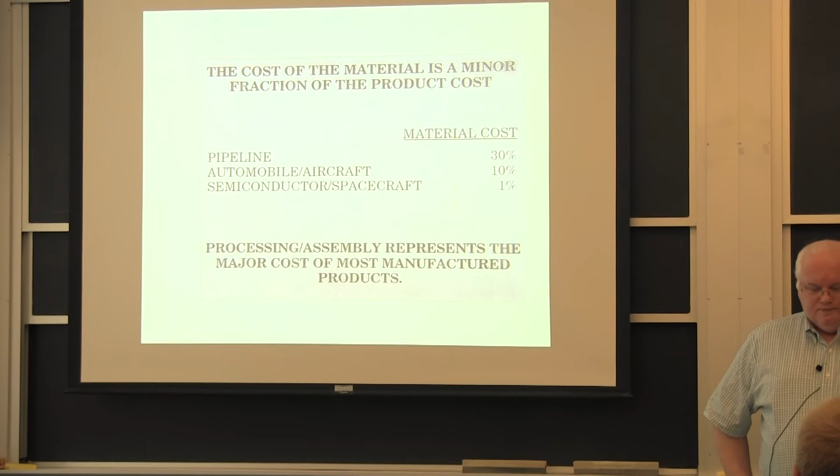Now, we can ask ourselves, and this is the last slide that I put up at the end of class last Thursday when I was lecturing. And it basically is, what fraction of a product's cost is the material cost? And the highest one that I know of is a pipeline. The steel that goes into a pipeline is about 30% of the cost of that project.

The rest of it is digging the hole in the ground, putting a corrosion-resistant coating on the pipe, welding it, burying it, inspecting it, testing it, all those other things go for 70% of the cost. An automobile or an aircraft, it's about 10% of the cost.

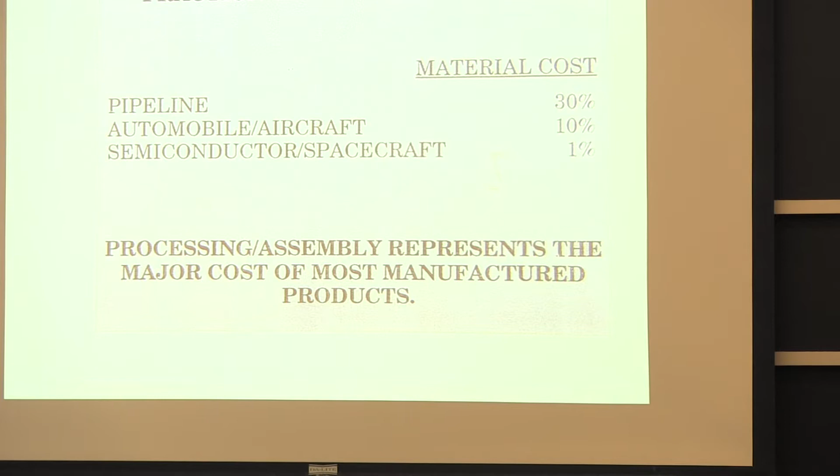Now, let's say I've got an automobile that costs $25,000. Does that mean there's $2,500 worth of materials in that automobile? No. Anybody know about how much the material costs in an automobile are? It actually is about 5%, because about 40% of that automobile cost is health insurance. Okay? If you actually go look at the numbers, the CEOs of a lot of the big automobile companies, and other companies too, have gotten very interested in health costs.

In fact, anybody live in Simmons Hall? Or know someone who lives in it? Okay, a couple of you. Do you know who Dick Simmons was? Actually, he still is. Dick Simmons was a graduate of this department in like 1952 or 53, got a bachelor's degree, went to work for a steel company, ended up owning the steel company and making about $500 million for Allegheny Ludlum Steel in 2 leveraged buyouts in the 1980s.

When the American steel industry was losing money regularly in the 1980s, Allegheny Ludlum never had an unprofitable quarter. That's because Dick Simmons, being an MIT student, didn't have to take economics or go to business school to learn to play with numbers. He actually could do them in his head. But he also understood the industry he was in, and he knew when to invest and what to invest because he knew how to make steel.

Then, during the 90s, his son-in-law made another $500 million for him in venture capital. But anyway, he gave $20 million to build Simmons Hall. In any case, what was I going to say? Oh, Dick Simmons put himself on the board of a major hospital in Pittsburgh because he saw his health insurance costs for his employees go through the roof, and he wanted to understand where hospitals were spending the money so he could try to lower health costs so he could save money in the steel company.

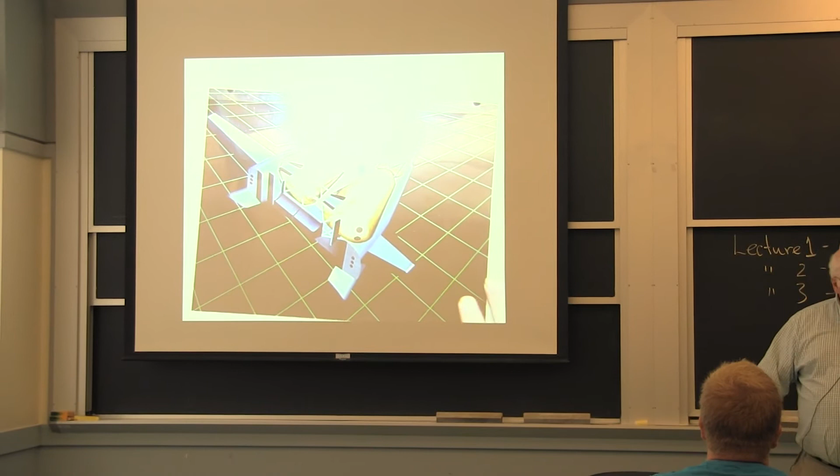The whole space shuttle program was justified through NASA, we said, but it was really justified for Defense Department needs. But there was once a time, about 10 or 15 years ago, they wanted to build a new type of replacement for the space shuttle, and they called it the X-33 Space Plane. This is a concept drawing of the X-33 Space Plane. And this was also supposed to get the cost to orbit down.

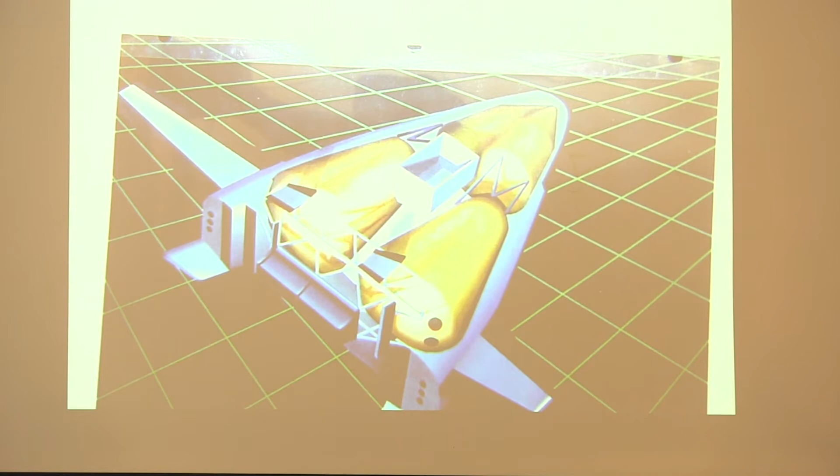The thing about the space shuttle, if you remember, if I went back and put this up, it's got this shuttle that returns to Earth. It's got this main tank and these rocket boosters. They recover the shells of the rocket boosters, but the main tank just goes to the bottom of the ocean, okay? So the bulk of the structure is a throwaway, disposable.

The X-33 space plane was supposed to be single stage to orbit rather than dual stage. And in fact, it was going to run on the lightest fuel possible, which is hydrogen, okay? And so it actually was going to run on hydrogen and oxygen. So this is an oxygen tank, and these two were hydrogen tanks, okay?

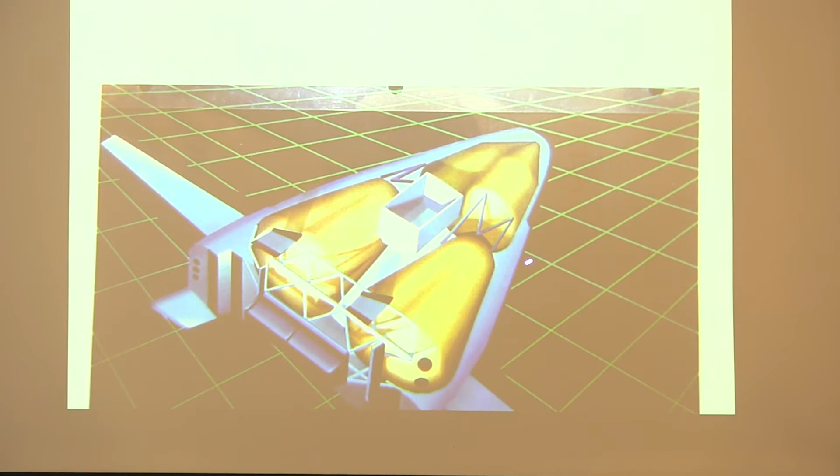And in order to save weight even further, so you can make it single stage to orbit and return the whole spacecraft to Earth when you're all done, they basically were going to make the tanks the structure, and this outer skin was really just a skin for aerodynamics. It wasn't the structural part. And so, in fact, NASA had a program to build a half-size space shuttle, which was the X-33 Space Plane.

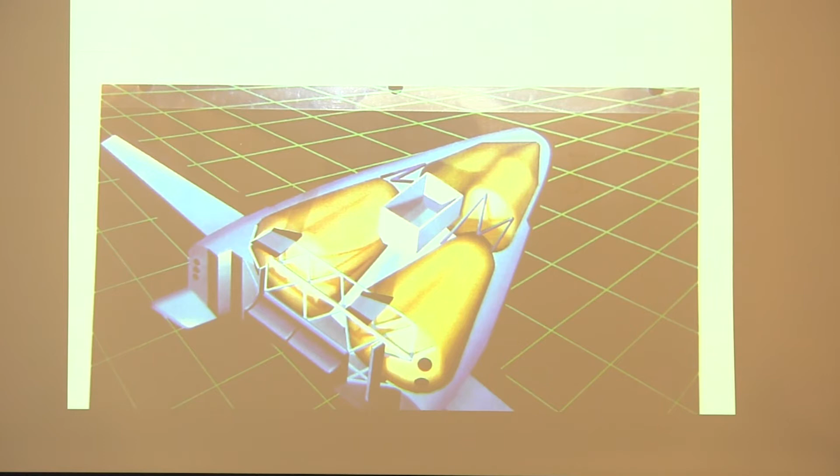It was supposed to go from the Lockheed Martin Skunk Works in Palmdale, California, and fly to Dugway Proving Ground in Utah. It was going to get up to about 100, 120 miles, and it was going to land. And this was right after the first Gulf War. The Defense Department was very interested in something called rapid prototyping.

So they gave this contract to Lockheed Martin and said, we want you to build this in 33 months from release of contract to first flight. 33 months. It's pretty fast to build a spacecraft that's half size. And so they spent the first 6 or 7 months, well, they were doing a lot of things, but they were developing the tanks.

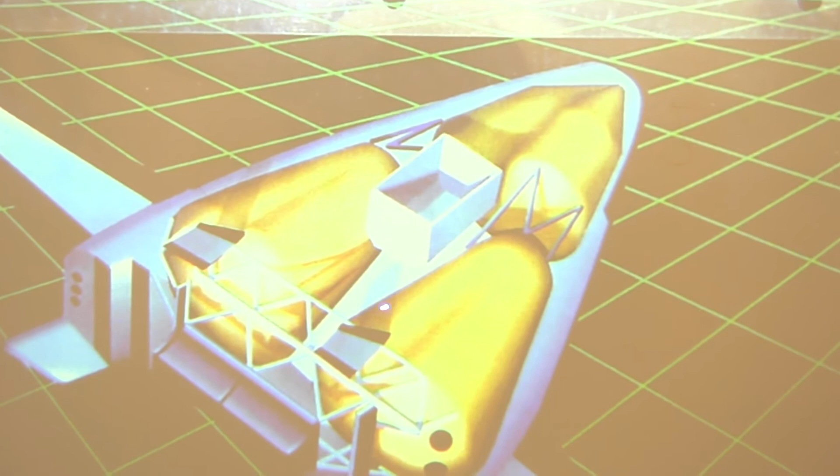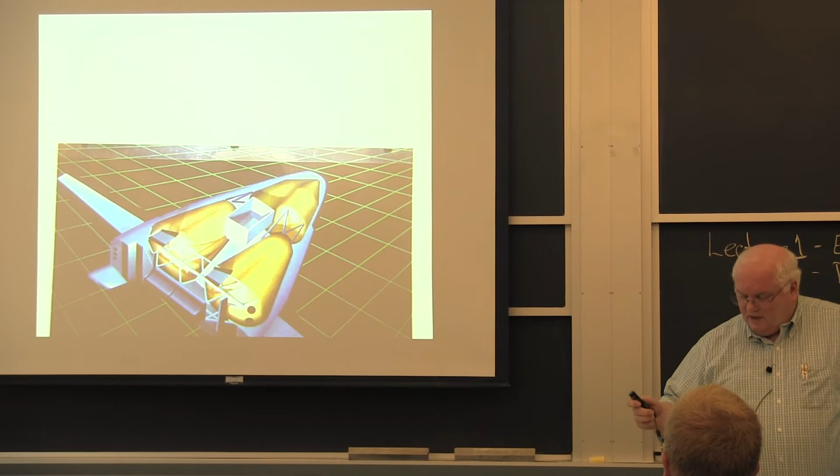And the tanks were supposed to be the structures, and you can see between the tanks you have these kind of connecting structures. So the main structure that held everything together was basically the tanks and these other things, and everything else was just an appendage hanging on. Of course, you had to have something to carry the thrust of the engines back here and whatnot. But they were looking at ring-stiffened cylinders.

A ring-stiffened cylinder is sort of like a submarine, okay? It's a big tube, and they have internal beams, and they were going to do 3D woven composites. And they were moving along with that, and they thought, this is wonderful.

And then they went out for bids, and they found that they would spend nearly the whole $1.3 billion for a 3D woven composite of graphite fibers, because how do you make a 3D woven composite? You take layers of 2D, wind them up, and then you have someone with a needle and thread the third dimension with these graphite fibers. And that gets to be pricey, okay? So they decided that won't work.

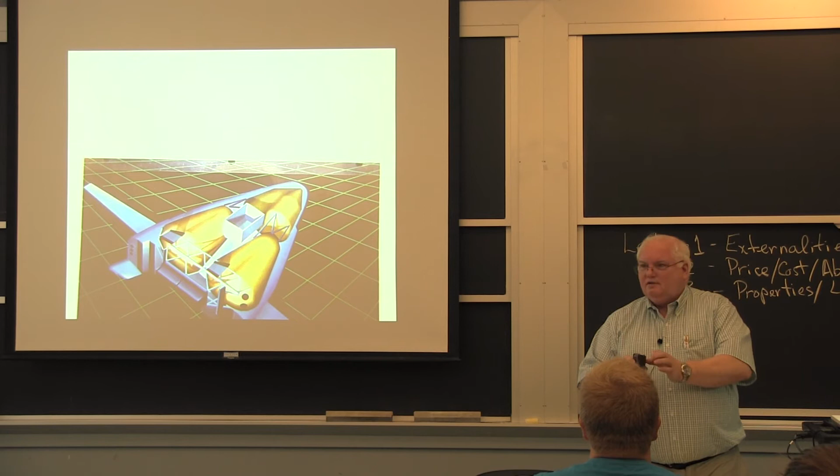Well, their time budget for the 33 months was such that they only had about 2 months left. And so they said, we got to do something else. And they said, oh, you can buy Nomex Hexcel honeycomb. Nomex is sort of like Kevlar. You can buy this, okay? And then you could put reinforced graphite fibers and epoxy coated graphite fibers, and you could make a very light, very rigid structure, and it would only be about 1.5 inches thick, and you could have titanium and other parts that would be the feed-throughs for the ports for various things.

And you could make liquid hydrogen tanks. The oxygen tank was going to be made out of aluminum, but they were going to make the 2 hydrogen tanks, and they did make 2 hydrogen tanks at the cost of $50 million a piece. They built them in the same hangar where the stealth fighter was built. I got to go there, in Palmdale, California.

What happened is they built these 2 hydrogen tanks. They had to put them in an autoclave big enough. These are both about the size of a small 2-story house. They had to put them in an autoclave to bond everything together. They were using sheets of adhesive to take the Nomex honeycomb that they could buy off the shelf and the graphite and stuff and glue it together.

And they looked on a website, and the supplier of this structural adhesive said it had a 10-day shelf life. Now, the structural adhesive is an epoxy, and they produce it and keep it in a refrigerator until you're ready to bond it, and you have 10 days, according to the little bullet on the website or on their brochure. Once you take it out of the refrigerator and it warms up to room temperature, if you don't put it in the autoclave and heat it up and get that epoxy to flow within 10 days, they thought, you're not going to get a good bond because the epoxy would start its chemical reaction at room temperature. That's why you store it in the refrigerator.

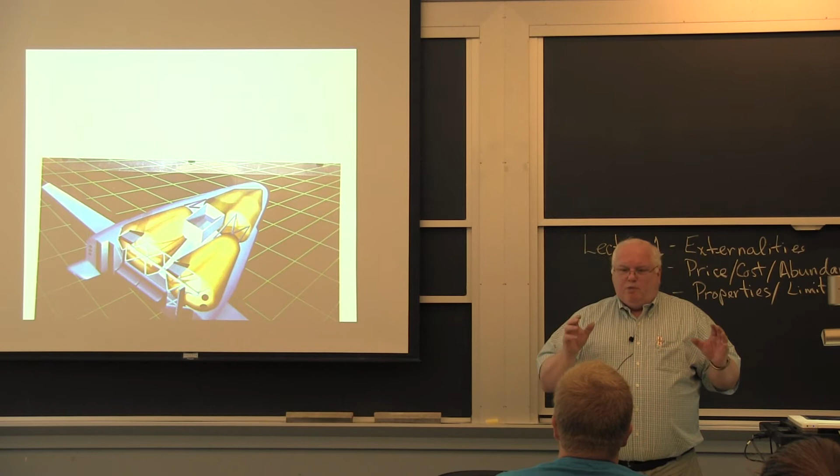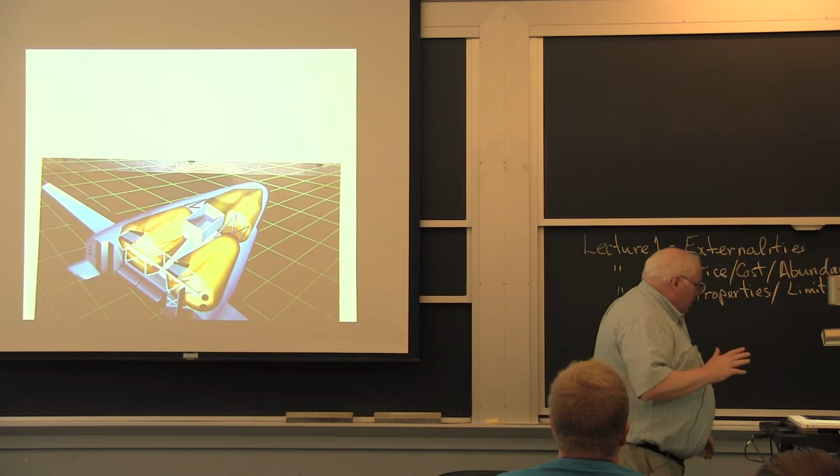So they did this, and it turns out in most cases they wound up this whole 2-story object and got it into the autoclave within 3 days, 4 days. One of them took 7 days. They bonded it, and when they pressure tested it, one of them failed, formed a big blister. And they said, what's going on here? Well, they found out about that bullet point that said it had a 10-day shelf life. You got to be careful about bullet points.

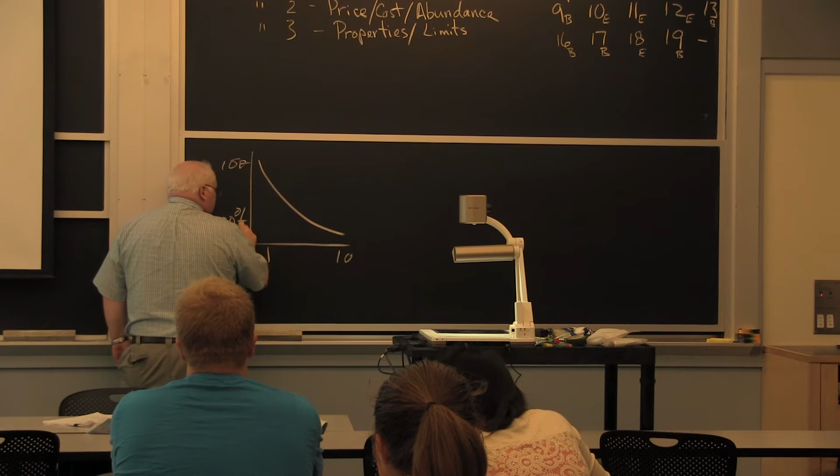When they actually looked at the data behind that, the strength of the adhesive looked like this: this was 10 days, and this was 1 day, and this was 100% strength, and this was about 10 or 20% strength. So they were out here at 7 in some cases. They told you the bullet point 10-day shelf life, but they didn't tell you you only have 20% strength at 10 days. The 100% strength was 1 day, okay? So that's the problem of not having all the data.

They had built these two $50 million structures. That piece that's going around is nice and light, but one of these H2 tanks weighed 4,000 pounds, and divide that into 50 million, that's $12,500 a pound fabricated.

Okay? So I don't know what that's worth. Doesn't matter. It's a piece of government property. I shouldn't have it. But I got it. Okay? In fact, if you want a whole tank, one of them didn't blow up. One of them's still sitting in Palmdale. You might be able to buy it at a discount if you need something for a chicken coop or something like that.

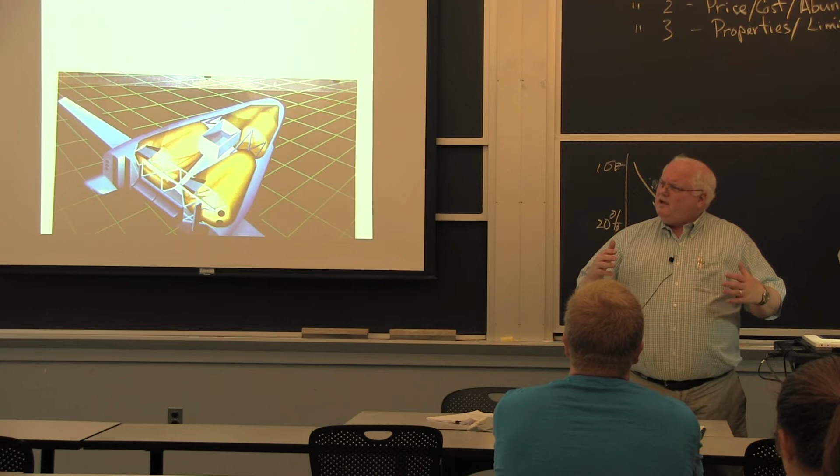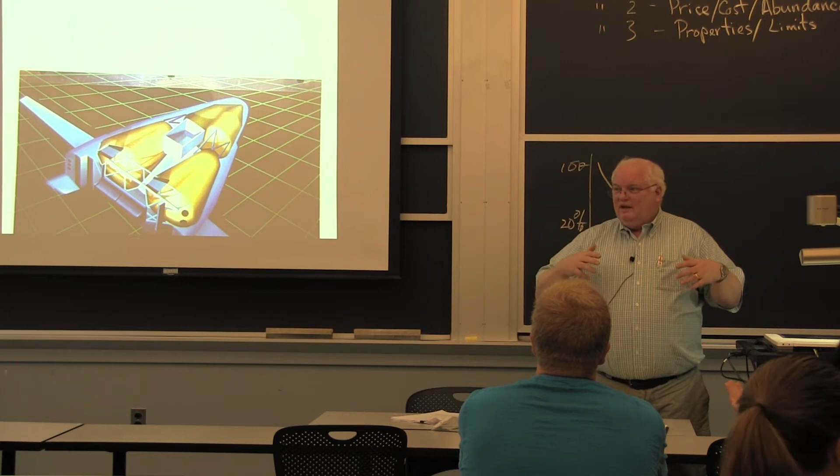But in any case, they put it in test in Huntsville, Alabama, one of the only places where you can test with, was it 5,000 gallons, anyway, it's either 5 or 10,000 gallons of liquid hydrogen. Not very many places have that. You can't go down to the store and get it. And it also happens to be removed from everywhere at Huntsville in case there is an explosion.

Okay, and they had passed the test. They thought they'd pressurized it, done their pressure prototype check, and everything was fine until it started to cool down, or actually warm up in this case. As it started to warm up, the whole thing was covered in frost, and they had it on a video, and they saw whoosh, a bunch of frost blew off. The thing had leaked. Did you know there's a difference in coefficient of thermal expansion between the graphite epoxy and the Nomex? And the adhesive joint, if it's not very strong.

Anyway, turns out they had a $50 million piece of junk. And they ended up eventually canceling the $1.3 billion program. And now other people have come in and they are trying to figure out how to commercialize getting into space, because NASA didn't do so well in their X-33 program and a few other programs.

So, and we're talking about selection of materials. People can talk about all these wonderful, fancy materials, but they often don't talk about the price of that material. They will talk about how wonderful the properties are. And there was a guy at General Electric Aircraft Engines named Bob Sprague. He was manager of materials. He was kind of one level beneath the vice president.

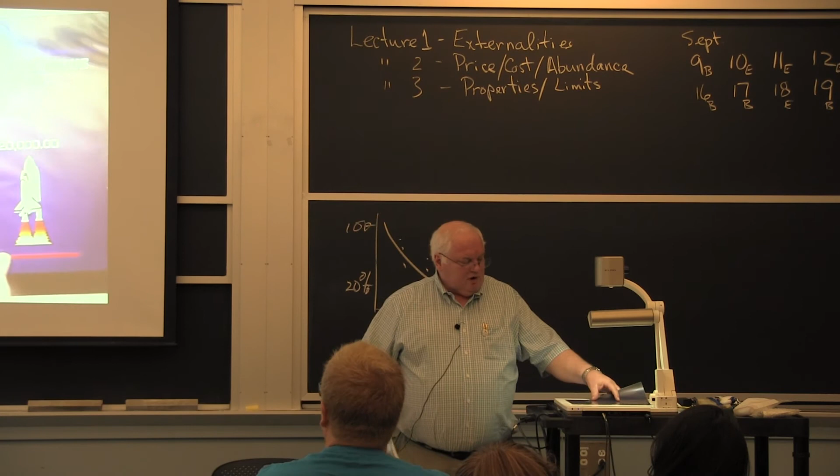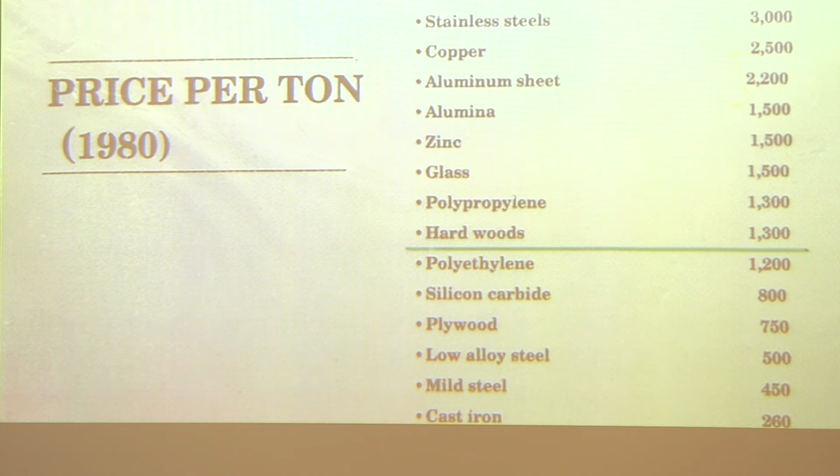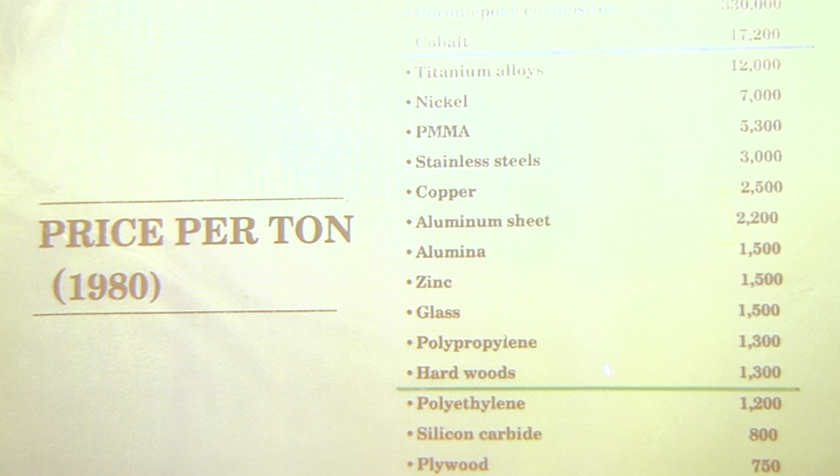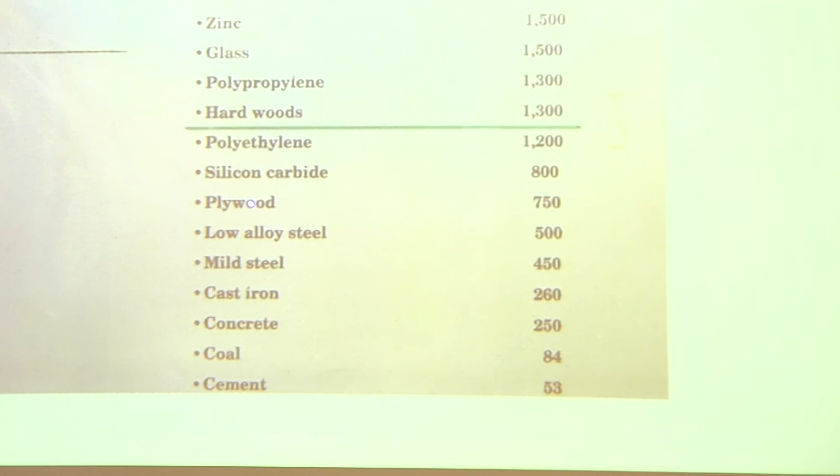The only things you really want to build aircraft out of are hardwoods, polypropylene, aluminum sheet, stainless steels, polymethyl methacrylate, that's basically sheet plastic, nickel and titanium alloys. Yeah, these things are all great. So here's spacecraft, here's the 10% value and price per ton for aircraft, and down here, this is what you can make an automobile out of. Polyethylene, silicon carbide, plywood, low alloy steel. This is cheap silicon carbide, that's not the really good stuff. Mild steel, cast iron, concrete, coal, and cement.

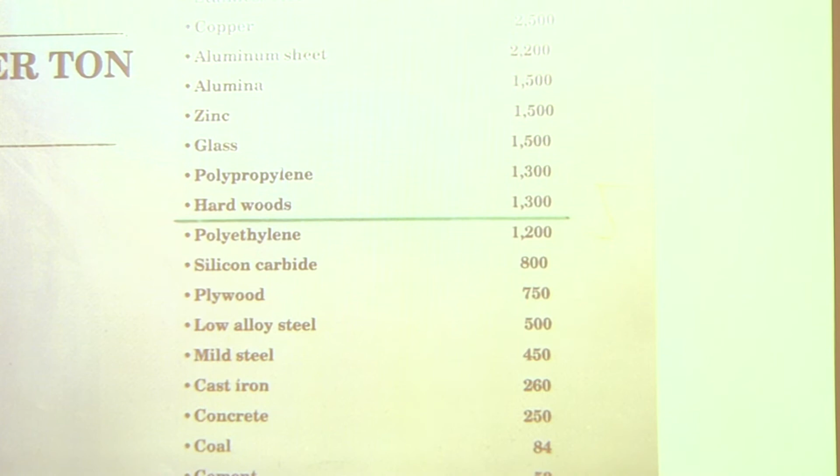And so it was knowing this type of information that I used to predict that we wouldn't be all riding around in aluminum automobiles 20 years later. And we're not. Yes, people make aluminum automobiles, but they're not making them for $25,000 vehicles. They're making them for $100,000 automobiles like Audis, and anybody can do that. It's not new technology. So the value of the material in its application is going to determine what are the allowable materials you're going to select.

And you hear all this press about high-tech materials, or what Jim Williams would call boutique materials. Jim Williams was a pure academic before he went to General Electric and the titanium industry. And he used to go around selling this schlock. And then when he went to industry, he realized you have this price function. If you can't sell it at a profit, the managers aren't going to let you use it. So there's a whole different world.

A new material for automobiles today is still aluminum sheet. This I got out of Ford Research. This is an ultrasonic weld on an aluminum sheet, where Ford's trying to figure out how to join it inexpensively. Because, hey, we had all aluminum Corvettes before we had fiberglass. Maybe we had fiberglass first, but in any case, we've been building expensive vehicles for a long time. But for inexpensive vehicles, aluminum's still a new material.

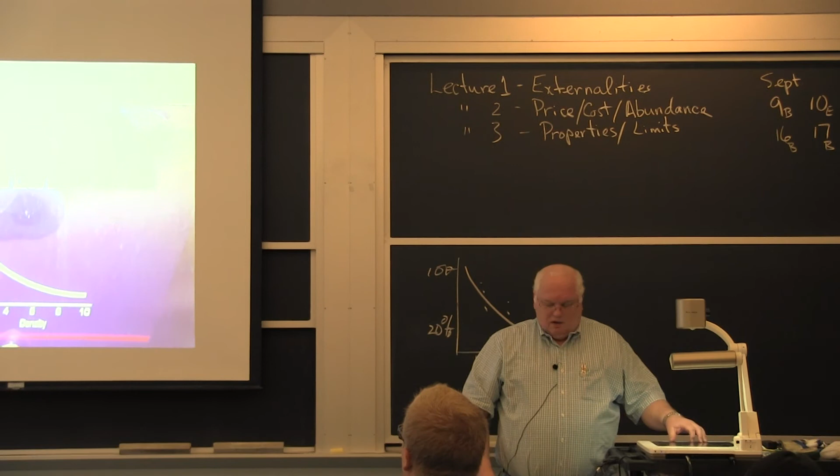But anyway, another thing that you need to worry about on the value of materials: that $200 or $2 a pound is just a general number, but if a product moves, the faster it moves, the more important the cost savings. Now, the example I usually give is just sprung weight on a car. It's more important to take a pound off the weight of the wheel or the brakes where you've got the unsprung weight, versus the sprung weight. I think I got the way they term that. That's not moving as fast, but if that wheel's bouncing up and down, there's lots of energy and wear and tear, and if you can take weight out of it, you're a lot better off.

And one of the best examples I have is when I talk about friction welding in the welding module, I talk about the blisk. It's called a bladed disc. They've built about 30 or 40,000 Rolls-Royce M250 engines that go in helicopters and small aircraft like Cessnas. It's just a small turbofan engine, and it has a cast blisk, about this big. It's a single blisk, a nickel-based superalloy, and the blades are cast directly onto the disc. You don't have all this weight that you have in a typical turbine blade.

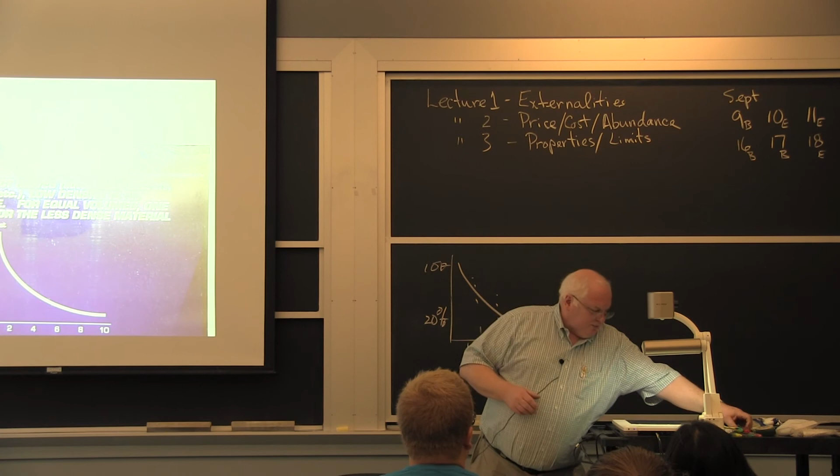In a bigger engine, you have to join the blade, which is a simple little airfoil here. Actually, airfoil is the general name; blades rotate and stators don't. But anyway, on the rotating part, you have this big Christmas tree structure. 60 to 70% of the weight of this thing is this structure down here to join it together mechanically. The machining on this is really critical.

On that, where you join that to the thing. You could get rid of all this structure if you could just weld this directly to the disc. And so the Air Force did a study. It turns out, in terms of the Air Force, the value of a pound saved turns out not to be $200 a pound in an aircraft. It turns out to be about $1,000 a pound in a military aircraft is the value of a pound saved over the life of the vehicle.

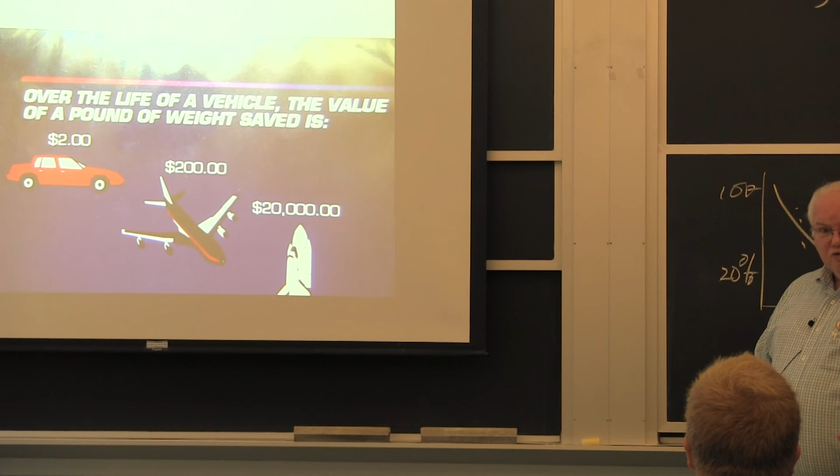I mean, some of these things are so high performance, you may only have a payload capacity of 5,000 or 10,000 pounds on one of these aircraft. And that can either go for increased distance, you can carry fuel tanks, or you can carry ordnance. Okay? And that's your payload, and what you're talking about is not just how many miles you're going to go or how many hours you're going to go, it's how much distance you can travel and carry ordnance to where you want it.

Friction welding of aluminum is what friction welding was invented for. And so the Space Shuttle main tank, actually, they were looking at friction welding of that, okay? That's the big tank that goes into the ocean afterwards. Since they're not making that anymore, NASA's now got a big program at Michoud. Michoud is in Stennis? Anyway, it's either Mississippi or Louisiana, where they used to build the space shuttle, for friction welding of aluminum structures.

And Boeing had a big program for friction welding because you don't get the distortion you get when you arc weld aluminum, and it should be a better structure. There was a firm that was going to build a private jet, and it's all going to be friction welded titanium. They went belly up, but they had a lot of Wall Street Journal press about how they were going to be lighter because they wouldn't have these big heavy joints. Mechanical joints add weight. If you can make a good weld, it's going to be lighter weight in general.

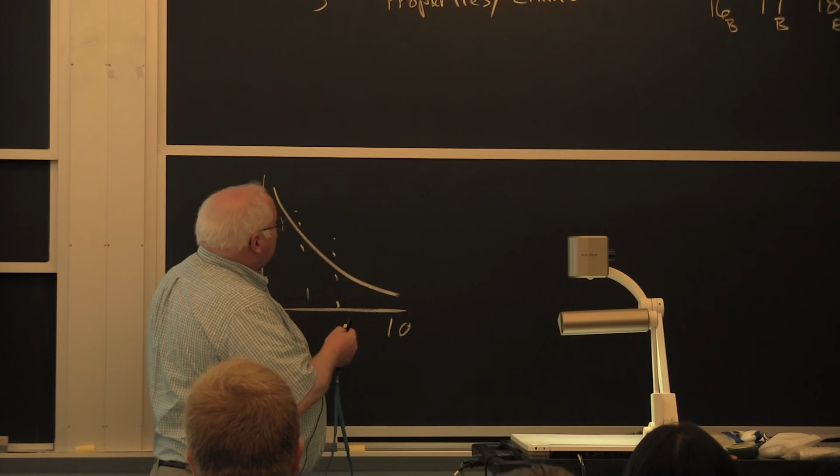But when you're talking $200 a pound for a pound saved, and you're making as many aircraft as Boeing's going to make, you can justify it at $200 a pound. But don't expect to see friction welding in automobiles at $2 a pound when you start looking at the capital cost of the equipment. Okay, so again, if I want to get back to these, these are not necessarily externalities, but they're functions on the price and cost, which is the tooling that goes to make all this, because that tooling and inspection and fabrication is 90% of the cost. The material is only 10% of the cost.

Okay, so all of us in course 3 think materials are wonderful. They're only wonderful for 10% of the world. You know, mechanical engineers have got a much bigger slice of the pie in terms of making things. But in any case, the Air Force had a big program to do friction welding of blades to disc, great big ones, and it never worked out. You can take my welding course and I'll tell you more about it.

But the idea was you could save 20 pounds off every disc, and that could be 200 pounds on an engine. If you could save 200 pounds on the engine, and you have multiple engines on many of these aircraft, at least if it's Navy rather than Air Force. Air Force doesn't mind having only one engine and losing aircraft. The Navy likes to have an extra engine.

In any case, if you take 200 or 400 pounds off the engine, you can take up to 2,000 pounds off the airframe, because those wings have to hold the engines, and if the engines are lighter, the whole structure can be lighter.